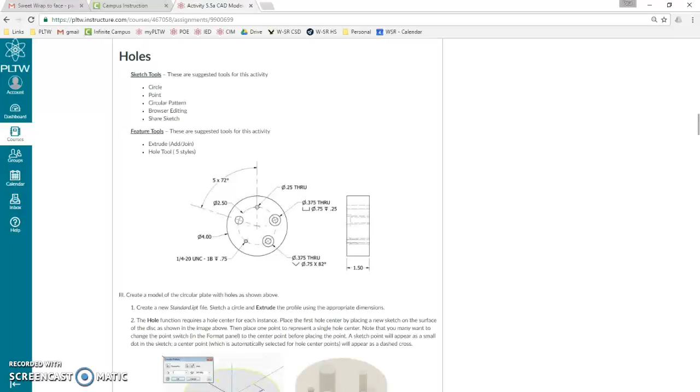We are up to 5.5a holes. So, new part file, start 2D sketch, just kind of try to match what we see in our image. So I'm going to use the XZ plane. I'm going to flip this. Not sure why they bring us in like that anyway.

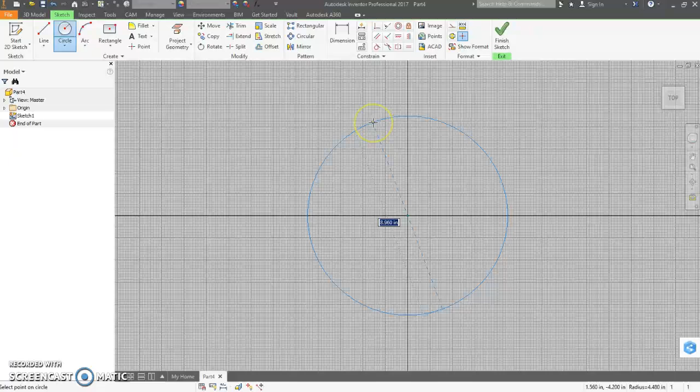I'm going to do a circle, the diameter 4 inches. Finish that sketch. I'm going to extrude that 1.5 inches according to the instructions. Well, this doesn't look exactly like theirs, so who knows why.

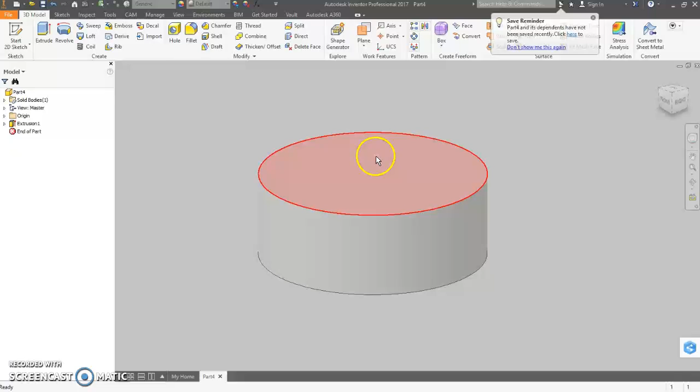Next, we need to create the center points for our 5 holes. We're going to use a circular pattern here within the sketch, and then later on we'll circular pattern a 3D feature. So start 2D sketch on that surface. Now, you can put a hole wherever, but it'll automatically place it in your center point, which is easy to dimension to if you have it there already.

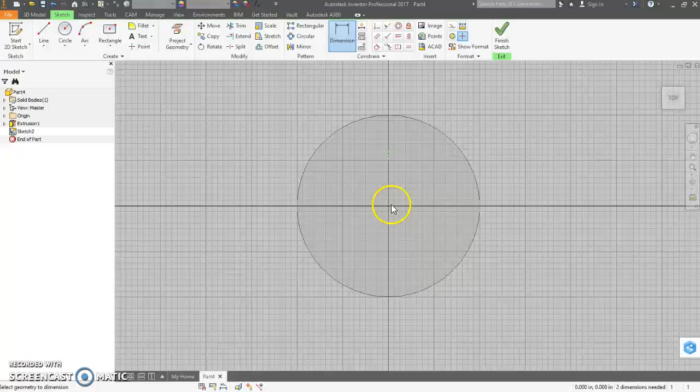So you can see the difference: a center point will have this crosshairs feature, whereas a point, which you can switch up here, it's already selected for us. You can switch it to a regular point for other purposes, but we want the center point. And I'm just going to place it on the axis here. And then I'm going to go back and dimension it the proper distance, which is 1.25.

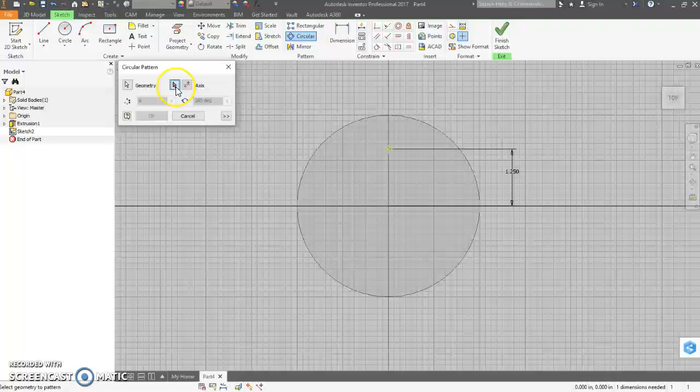The next step would be to do a circular pattern for our other 4 points. So what geometry do we want to select? We want just our point. What is our axis? We're just going to use this center point, our origin. And we need 5 total, so make sure you change that. And that's what we need.

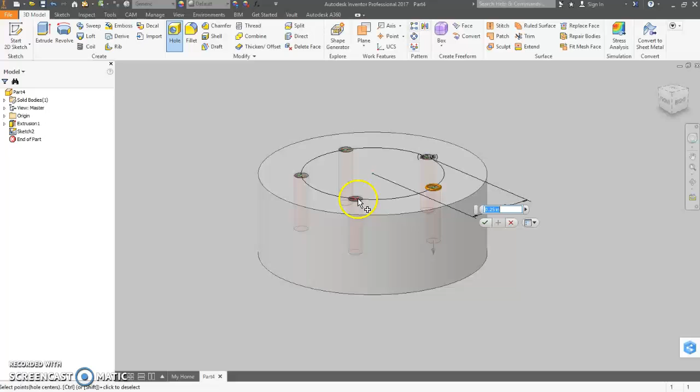Now, we go to the hole feature, and we don't want all 5. So we need to hold the Shift key and then click on each of these to get rid of them, if it wants to do it for us. Don't know what was going on, but we'll do one hole at a time, and this should have popped up. It's on my other screen.

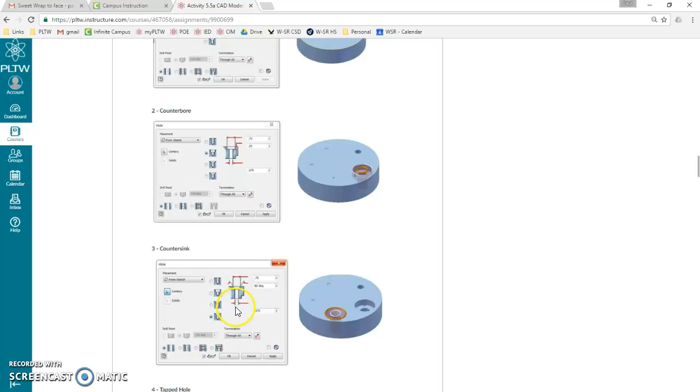So if we look at our assignment, here's all the details for each of our 5 holes. The most common thing to miss is the through all on each. So I've given you the total volume that you should get when you're done with all, but I screwed that up the first time, so.

But we don't make mistakes here in Inventor. We just have happy accidents.

So the first hole, if you can read it, it's just a simple through hole. So we need this selected. We need through all. We need 0.25 inches. And that's it.

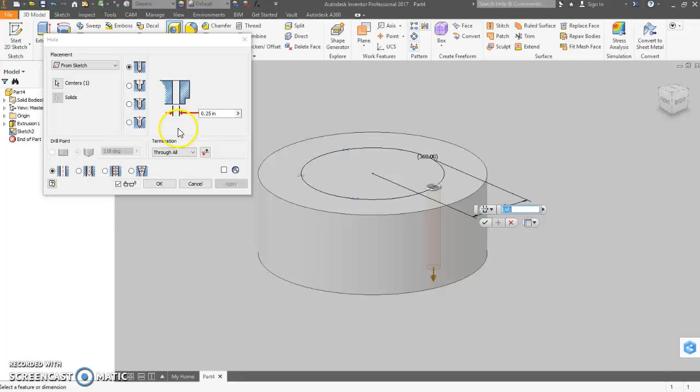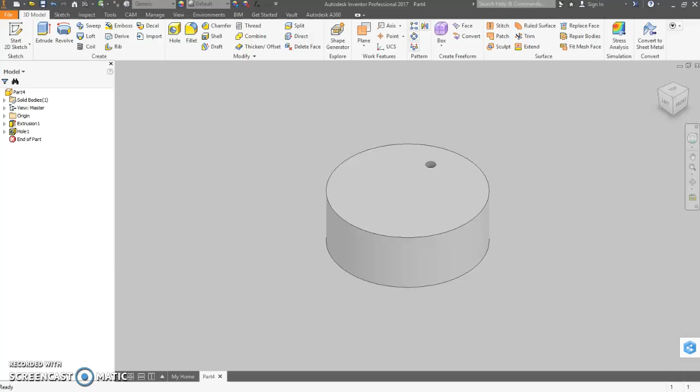The second, so now, you notice all our sketch disappeared. That's because it's been, what's the word? Whatever. We need to share that sketch. And so you can come in here and open up hole 1, find your sketch, and you can right click and hit share, or it's just as simple to grab it and drag it out. So not only does that allow us to use it again, but even as we use it the next time for the next hole, it will stay there. We won't have to keep sharing it over and over.

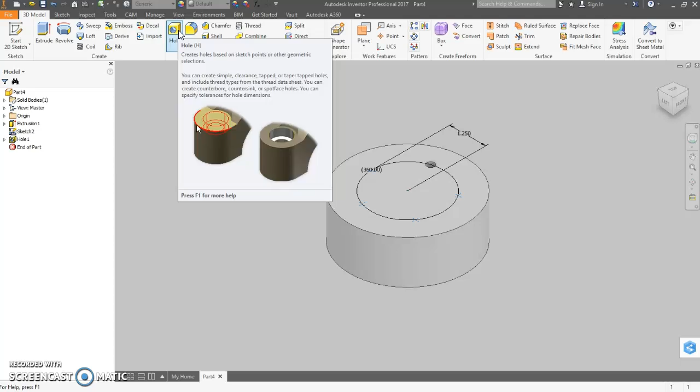So the next hole is a counterbore. It doesn't matter where you put these, but let's try to match it. This is 0.75. This is still 0.25 inch depth. This diameter down here is 0.375. We want a through all. A lot of things to check here, and it'll get worse.

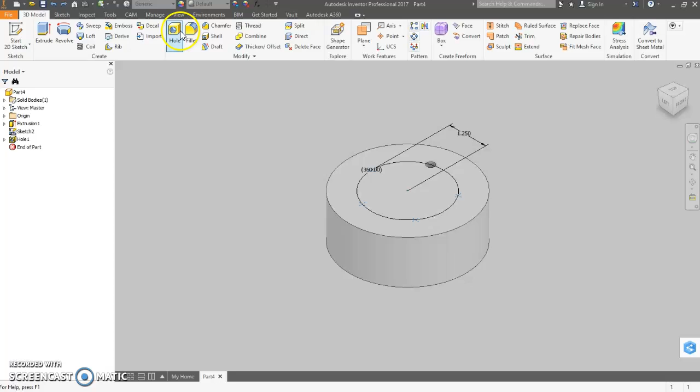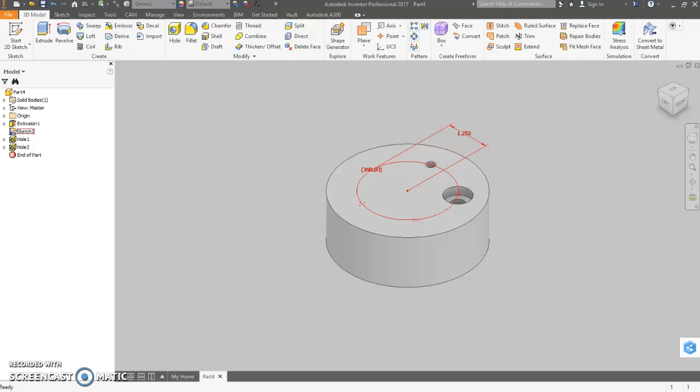So hit OK, except I forgot to deselect all of those holes. So, once again, hold the Shift button. Go back in here. It saved our numbers. Yes, it did. Okay. Now you notice sketch 2 is there, but it's still shared up here. It's got the little hand underneath it. Consumed, that's the word. It was consumed by hole 1.

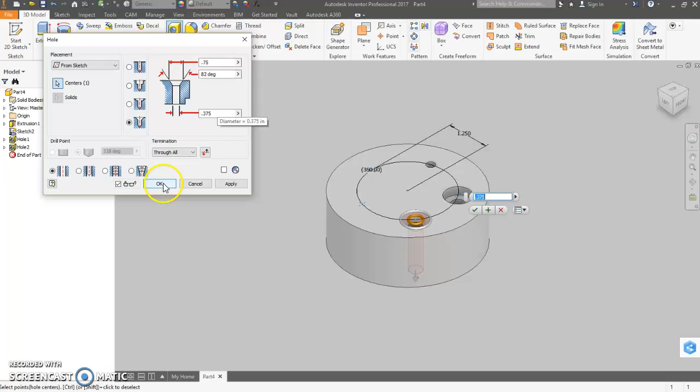Okay, new hole. Don't want these two. Hole 3 is a countersink, which is this. We want this 82 degrees, 0.75, 0.375 through all. That should be it. Another hole. Deselect one of them. This fourth one is a tapped hole, so that is down here. We don't want the countersink.

Now for the threads, ANSI Unified Screw Threads, 0.25. We need class 1B. No idea what that means. 1/4-20 UNC through all. Believe we have it. And if you look at that, you can see the threads.

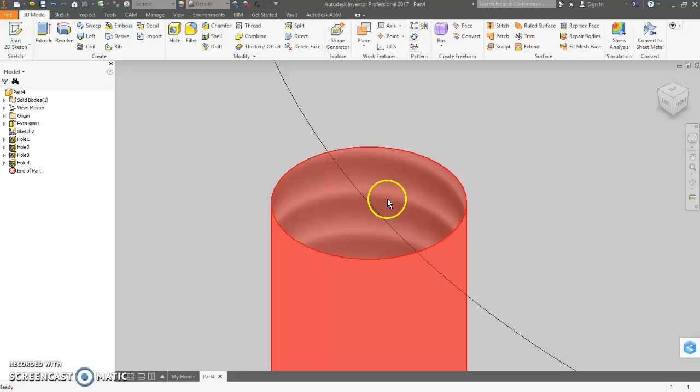Last hole. This one is a clearance hole. So that would be this. Through all, let's change the distance for some reason. Through all, we want a hex head bolt. We want 1/2 inch. Fit normal. Let's use screw threads, okay. And, oh, yeah, we want this. That's just given to us.

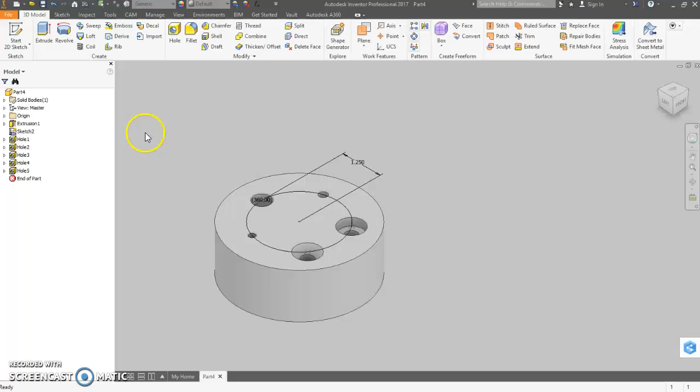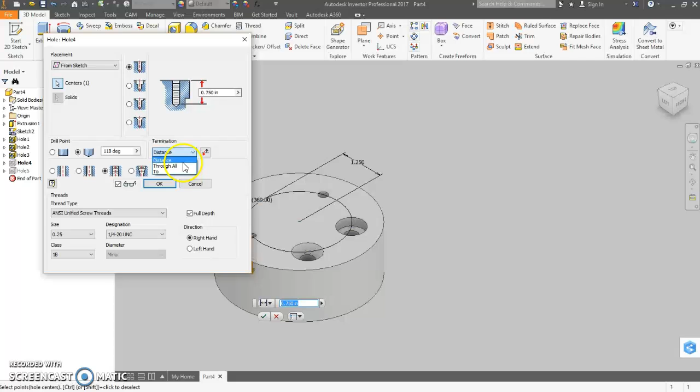Okay, now, moment of truth. Do we have a volume of 17.953? No, I missed one. A little too big, so we go back and, once again, check our holes to see if we missed a through all, and here it is, hole 4. Properties, physical, update, 17.953.

File, save as. 5.5a Holes. Whoa. Initials.